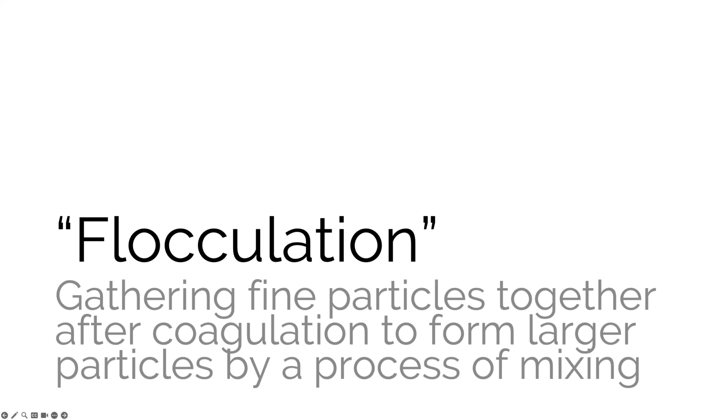And then we'll touch lightly on flotation, which is of course the opposite of sedimentation. Here we're raising lighter materials to the top of the wastewater for removal, things like fat, oil, grease, hair, and other things like plastic, things that are light. This can be done a lot of different ways with aeration, evolution of gas in water, chemicals, electrolysis, heat, and bacterial decomposition will do it as well.

If your wastewater goes septic, you can have things floating to the top that you don't want to. Some materials float by themselves given enough time. Fats, oils, and greases are in that category, which is why we typically have skimmers on the top of clarifiers so that we can capture those things that are sinking and those things that are floating. What those floating substances have in common is that they have a specific gravity less than 1. In other words, they're less dense than water, so they're buoyant and they float on top.

We'll kind of touch on flotation as it applies to different processes that we go through today, but the primary focus is going to be on sedimentation, primarily in the preliminary and primary treatment stages, although we'll touch a little bit on secondary treatment as well.

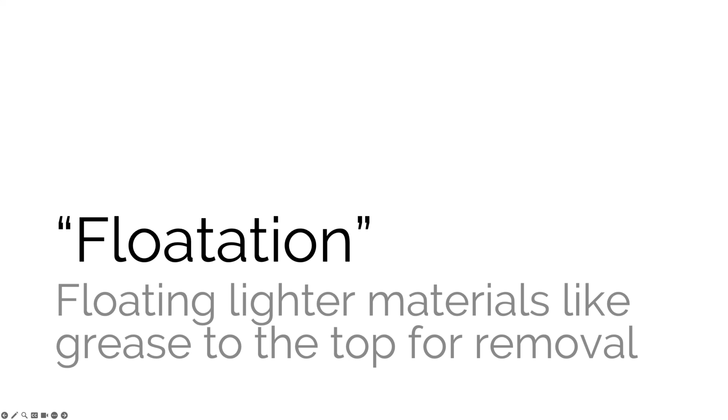The sedimentation principle is really used throughout the treatment train. In most cases, the primary purpose is to produce a clarified, though not necessarily clear, effluent, depending on where you are in the treatment process. And in many cases, to produce sludge that has a solids concentration that enables it to be easily handled and treated.

If you were with us in our last session, which was an overview of preliminary treatment processes, you got a preview of sedimentation without the math that we're going to be doing when we discussed grit removal and some of the velocity-based methods that are used.

Those particles are lighter, with a much lower specific gravity, much closer to 1, typically just above 1 to maybe 1.25 range, and the size of that stuff can be really, really small, down into the micron ranges.

The time it takes for settling to occur in primary and secondary treatment is typically a lot longer than in preliminary treatment like grit removal. In grit removal, we're talking about detention times and settling times in minutes, whereas in primary and secondary treatment, that can be in hours.

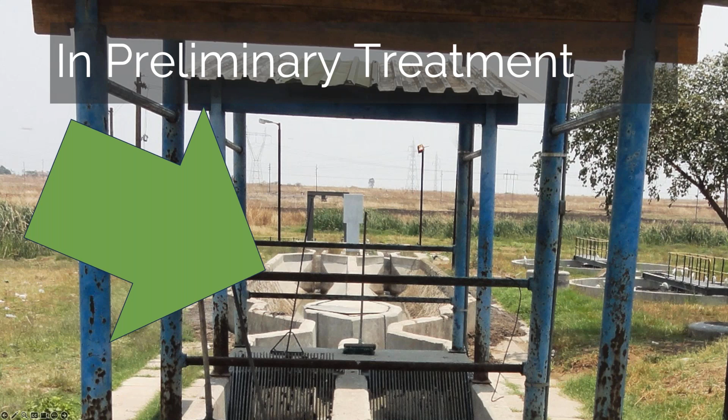As I said, we use this in primary treatment. Mostly what we're targeting in the primary treatment stages is TSS removal, total suspended solids. Tank shapes vary, but the principle is the same: we're using engineering and operation principles to give those particulates time to settle out in the tank so they don't get pushed on to the next stage.

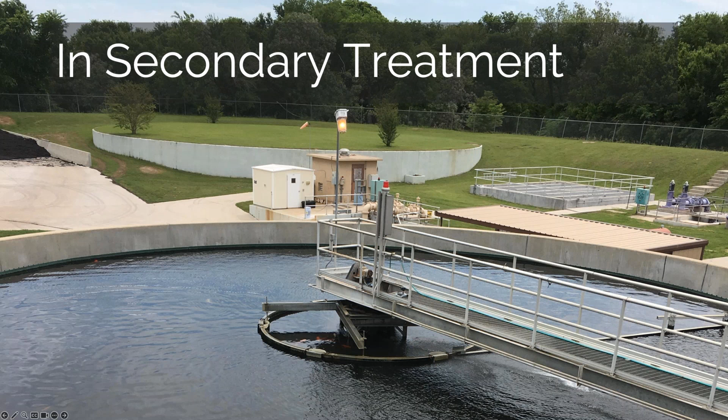We use them in secondary treatment as well. Here we're typically removing biological floc that's left over from the activated sludge process, and we might actually be removing chemical floc as well if we have a chemical coagulation process going on.

Again, much slower detention times that we're talking about, and obviously we're going to be getting much clearer water. We talked about relative clarification. The water coming out of the secondary clarifier is going to be a lot clearer because it's basically ready for disinfection, potentially dechlorination, and discharge.

So you can think of the settling or sedimentation process in a couple of different ways. There are actually several kinds of settling going on within the treatment plant, and gravity is central to all of them, but with smaller particles, we have to consider the interactions between the particles as well as gravity. Again, the primary purpose of any settling process is to produce a clarified effluent and sludge that has a solids concentration we can use, and how clear that effluent is going to be depends on where in the treatment stages you are.

Discrete particle settling is the grit and sand removal. Those particles are big enough and heavy enough that they essentially settle out by gravity without really any significant interactions between the particles. Flocculent settling is a little bit different.

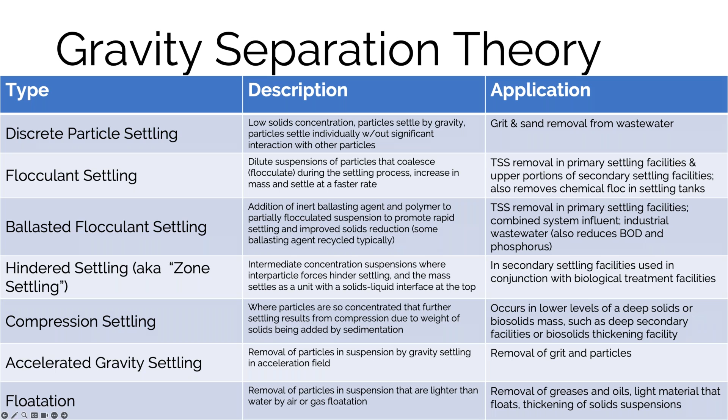So those are some broad categories, but one way to think about all of these is to think about snow falling in a storm.

If you've got a hailstorm, those are discrete particles. They essentially come straight down. They might be going diagonally because of the wind.

You can think of flocculent settling, hindered settling, and compression settling as analogous to what's going on during a heavy snowfall. At upper levels you've got discrete snow crystals. As they fall, they conglomerate together, so you get big flakes. They lay on the ground eventually, and at the surface you've got this mushy conglomeration of flakes together. The more snow builds up, the more compressed the bottom layer gets as you go. I think of that as a useful analogy to physically think about what's going on in that process.

If you happen to have a snow globe at home, shake it up and watch what's happening. That'll give you an idea of what's going on with flocculent settling. But as I said, we use settling throughout the process.

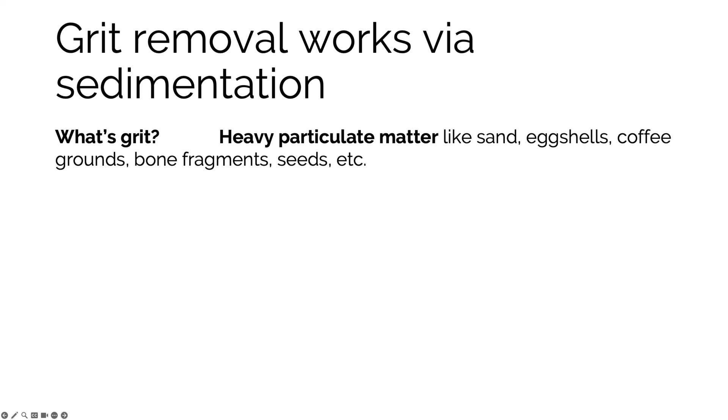I'm going to start with grit removal sedimentation, because that's the easiest thing to model. Remember, grit is that heavy particulate matter—sand, eggshells, coffee, bone fragments, things like that. Typically what we're doing is reducing velocity so that those particles can settle out.

If you were at the preliminary treatment webinar, you'll have seen some additional things that we can do. But for this simple example, we're just going to focus on reducing water velocity, letting those heavy particles settle out, and the lighter organic particles move on to the next treatment.

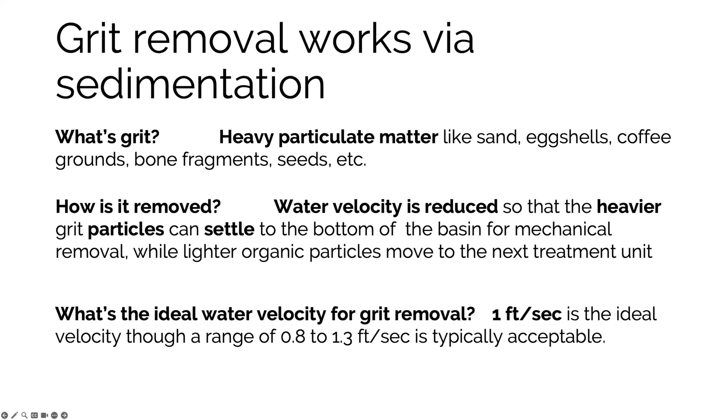It just so happens that the ideal velocity for that is about 1 foot per second, although 0.8 to 1.3 foot range is typically acceptable.

This is important, because in this process we're targeting grit, that heavier specific gravity stuff. We want the organics to move along, because if things are going too fast, we're going to push that grit into our primary tanks, which we don't want, because that'll negatively impact our primary treatment stages.

And if things are moving too slowly, organics will settle out in the grit, and when we remove it, that'll continue to decompose, create odors, and potentially attract vermin. So this is all about dialing in the appropriate velocities and depths for the particular constituent material we're trying to remove.

So now that we've got a bit of an overview, concept, and theory down, let's look at a little basic math.

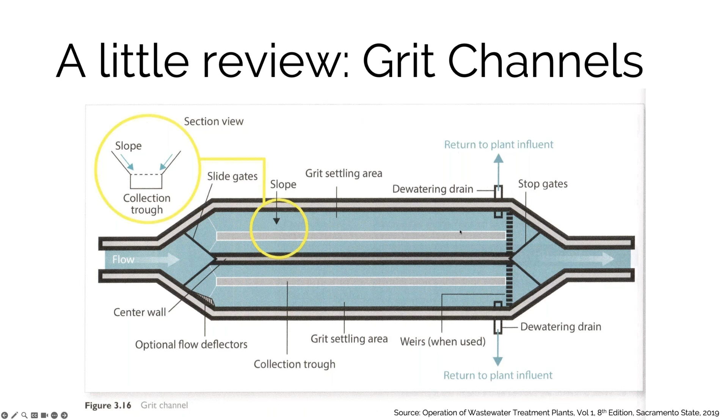Assume we're looking at this grit channel, and for some reason we're only using one side of it—maybe the other side is under maintenance. So we've got a single channel that we're looking at, and we're trying to remove particles, sand and some heavier particles.

We've established from looking at references and doing some lab tests that the downward settlement velocity is about 0.075 feet per second. That's a good benchmark for grit. Your mileage may vary depending on the size of what you're dealing with and what it's made up of, but for our example we'll just assume we've established that.

We've got a 5-foot deep basin with 4 feet of water in it. So we need to figure out how long it's going to take for that grit coming in at the top of the channel to settle to the bottom where we can collect it.

We can figure out the settling time pretty simply. Settling time is just the depth of the water, not the channel, divided by the settling rate. So we've got 4 feet of water, a 0.075 feet per second settling rate—that gives us about 53 and change seconds for grit to settle out inside the tank.

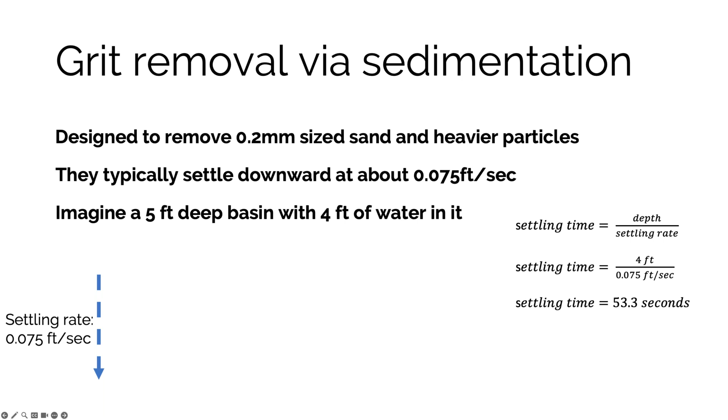Of course, that means the basin has to be long enough for the particles to settle before the effluent stream gets out, because there's a horizontal flow velocity going on as well. We established earlier that 1 foot per second is ideal, but since things are moving down and across the tank, they're actually settling in at sort of a diagonal.

So we need to figure out whether our grit particles are settling out inside the tank or getting pushed along. That's a relatively easy thing to do. We know what the velocity is here, and we know the time needed for particles to settle inside the tank, 53.3 seconds. So we can rearrange our velocity formula to determine the length or distance they're likely to travel. At 1 foot per second times 53.3 seconds, they're going to go 53.3 feet on the outside.

Of course, not every particle is at the top of the column when it comes in. Some are going to be lower, but this is kind of the outside edge. Of course, you can't randomly change the length of the basin, but if you had a 50-foot basin and you were running it at 1 foot per second with these parameters, and you were getting too much grit passing into your primary settling tank, this would give you a clue as to what's going on. Maybe your water is going just a little bit too fast for your particular setup and you need to slow it down.

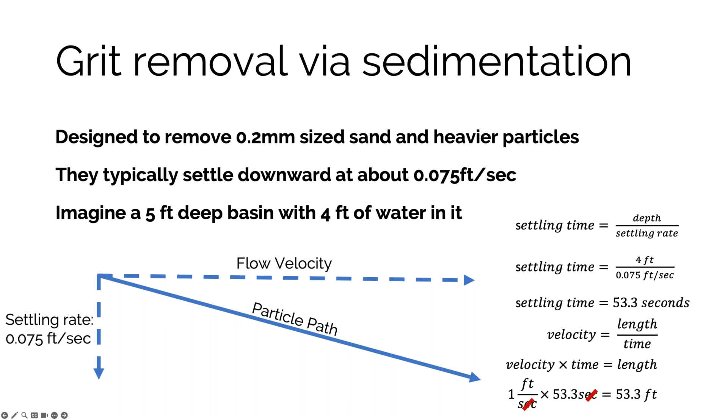So we can use the same formulas to figure out the maximum velocity for this particular tank, which again is 50 feet long, 4 feet deep. We know the settling time, we know the length, we're going to use the same formula, we've just got two different variables here. So instead of looking for length, we're looking for velocity. 50-foot tank divided by 53.3 seconds means our maximum velocity should be about 0.94, which theoretically at least means if we slow our velocity down a little bit by about 1/10 of a foot per second, most stuff should fall within that tank.

So very basic math, but really useful. You can kind of model what's going on in your tank, or check what's going on in your tank based on your observations of things going right or wrong.

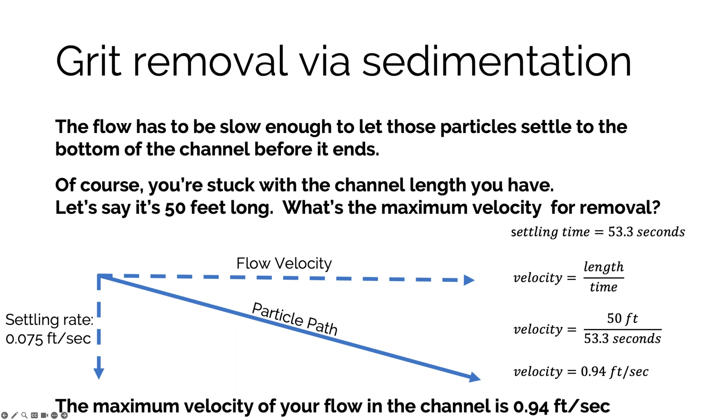So maybe you're doing this to figure out what's going wrong. Ultimately, you've got to figure out if that 0.9 feet per second is going to be effective, or if that's within the normal range. Fortunately, we can look these things up. As we said before, typical range for this is about 0.8 to 1.3. So at 0.94, we're probably within the right range. We might be able to slow it down even a little bit more.

But as with all things, there's theory and practice. Something might not be designed quite right. Maybe it's not operating quite as intended. So you might have to make some process adjustments and do some other calculations to figure out what's going on. But some very simple math here can give you an idea of why grit might be ending up outside of your channel.

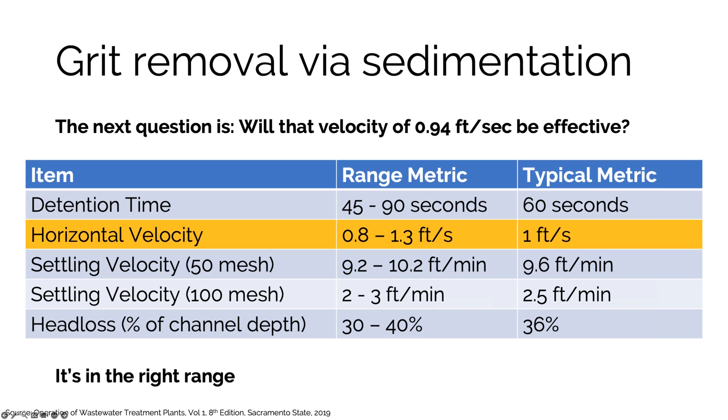Based on those results, you might realize, hey, the water's actually too deep. I need to run 2 channels at high flows and maybe only 1 at low flows. And you can use some observations and math to decide when you open both channels and run them at 2 feet, because if it's only 2 feet deep, it's going to take a lot less time for the solids to settle out, or what other options you might want to take.

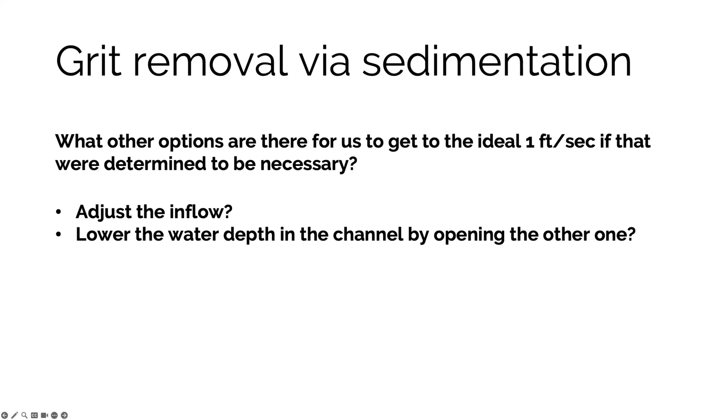You could adjust the inflow. You might lower the water depth, like I said, by opening up another channel. Maybe, as we discussed in the last training, you have a flow equalization process as part of your preliminary treatment train. So maybe you can alter those flow equalization processes to dial in the velocity and volume of water going through your grit settling tanks. There may be other options. You might realize that you need to slow it down to keep the grit out of your preliminary or primary tanks, but that you are thereby going to trap some unwanted organics. But there may be a solution for that.

Maybe you add a grit washing stage in between them so that you can then flush those organics back out and put them back into the wastewater stream. You might actually end up having to replace those channels with a cyclone. Who knows? A drastic change might be necessary for your system if it was designed for maybe a smaller population than you currently serve.

My point here is not to give you a definitive answer to solve the problem of excess grit showing up in your primary sedimentation tank, because there are a lot of reasons that could be happening. The point is to show you that some basic math, observations, and an understanding of what's physically going on in that process can help you determine A, whether your system is operating within typical or specific design parameters, and B, what impact prospective changes might have on your operations, and whether they're likely to result in the results you intend.

So, what could work, what would be practical? Those are different questions that you have to ask yourself.

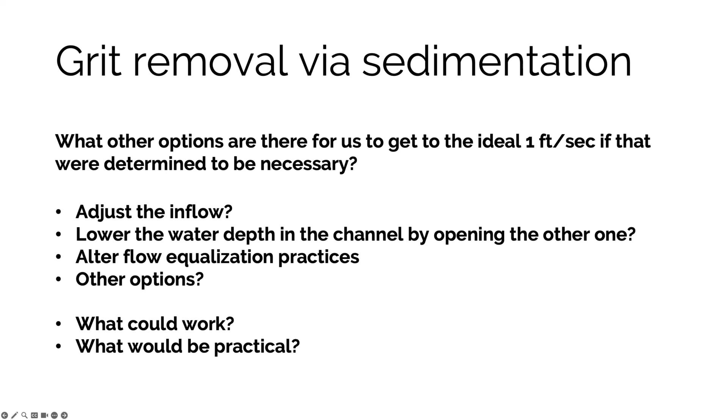And if you've got a real basic channel and you're wondering how do I figure out what the flow velocity is, a quick and dirty method: throw a stick at one end, see how long it takes to get to the other side, and use that formula d over t. Just recognize that the actual average velocity is going to be a little slower than what you calculate, because things move a bit faster on the surface. So that's a very basic example.

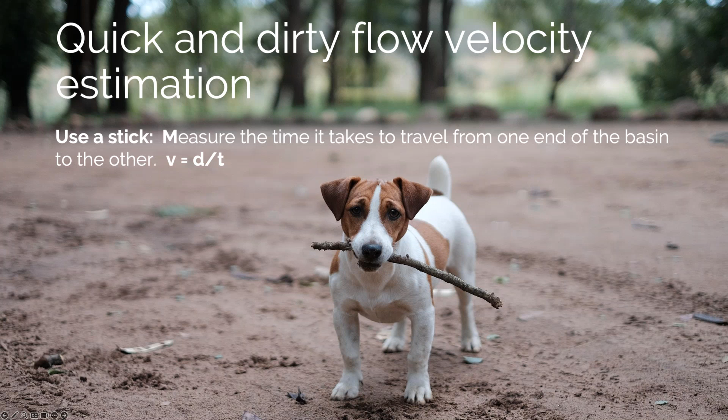Of course, that's not the only kind of grit removal process. There are aerated grit chambers as well, where we've engineered it so the water comes in at 90 degrees to the length of the basin, creating a spiral which pushes sediments to the bottom. We've also added air bubbles, or aeration, which lowers the specific gravity of the influent. An air-water mix has a slightly lower specific gravity, slightly less buoyant than water alone.

If you recall our regs and safety webinar, we talked about safety around activated sludge tanks, particularly the aerated portions. If you fall in there, there's a very good chance you're going to sink to the bottom, because the aerated water has a lower specific gravity, even though you might float if the aeration wasn't on.

When it's on, you might think the same thing's going on in this process, except instead of keeping everything moving, we're focusing on grit removal by lowering the specific gravity of that air-water mix overall. It facilitates the dropping out of that heavier grit.

I'm not going to show you any math for this particular instance, but I do want to show you that with slightly more complicated engineering, we get additional parameters to play with. So if you were having issues with grit moving through here, you have the ability to both change the depth of the water and change the aeration as well.

So you've got a mechanical action going on here, and you've got a specific gravity action going on here. So you've got some additional variables to play with, but still you can use the basic math to figure out whether things are working as they should.

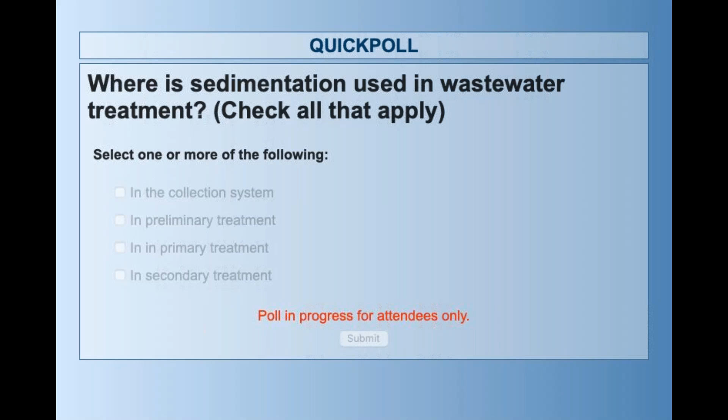All right, we got most of this right. So it's used in preliminary treatment for grit removal. It's used in primary treatment and secondary treatment as well to remove suspended solids. Typically not used in the collection system. It's actually kind of the opposite of what we want to happen there.

If you remember back to one of our earlier videos on collection system design, we talked about scouring velocity and how collection systems are actually set up so that the effluent, at least at peak flows, runs through there and scours anything that's deposited inside the collection system out.

Of course, there are probably some systems out there that have some sedimentation basins out in the collection system, but that's atypical. So it's preliminary treatment, primary treatment, and secondary treatment. It's actually the opposite of what we typically want in the collection system, because if there's a lot of settling going on there, that means things are getting plugged up and we're having to go in and clean them.

Can we run the second poll question while we're here? This is just a quick definition to remind you of what flocculation is. So is it breaking up big particles into small ones, gathering fine particles to form big ones, or discrete particle settling?

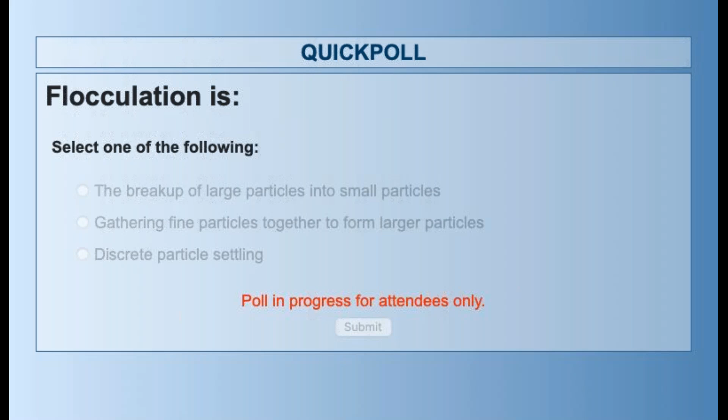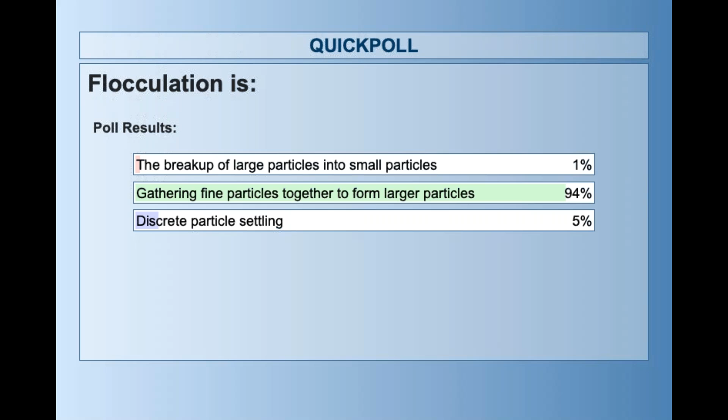All right, closing the poll in 3, 2, 1. Almost everyone got this right. Yeah, it's gathering fine particles together to form larger particles. Discrete particle settling is really more like the settling for sand and grit, where the particles aren't really interacting with each other. Breaking up large particles into small ones is the exact opposite of what flocculation is. We're basically trying to glom those tiny particles together so they'll fall out a little bit quicker. Good job, everybody.

So let's move on, now that we've done a very simple example, to talking about sedimentation in primary treatment, in primary settling basins. This is going to take up the bulk of the discussion. In primary clarifiers, they're designed to remove solids that will settle easily to the bottom or float to the top, but sedimentation is usually the principal basis of design for clarifiers.

And what we're focusing on here are suspended solids. The reason we're trying to get those organic solids out in this phase is because they typically have a high BOD, or biochemical oxygen demand, on the receiving waters and the biological treatment units. We don't want to starve the bacteria we're ranching in later stages, and we don't want to overwhelm them either. So we use our preliminary or primary treatment to dial in the BOD and solids that we want to move on to later stages.

But in primary sedimentation, we're not trying to remove everything, we're just trying to remove the bulk of things. We'll look at some typical removal rates here in a second. But because the specific gravity of the particles we're dealing with in primary treatment, those organics, is so small, and because we're relying on naturally occurring flocculation, the settling rates are really, really slow.

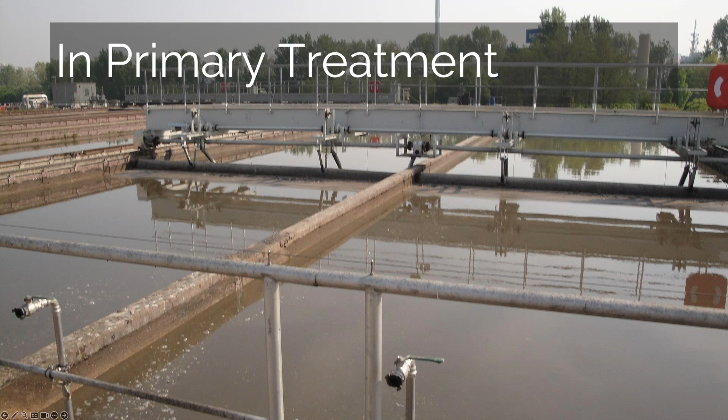So let's use the same math we used before to analyze what's going on in a primary tank. In this case, we're looking at particles with very low specific gravity, maybe 1.05 and lower, so they're going to have a much slower settling rate. Settling rate for particles in this size range is usually around 0.17 feet per minute, or 0.0028 feet per second. Look at this closely, because when we were talking about grit removal, we were talking about 0.75 feet per second, which is actually 45 feet per minute settling rate. So we're an order of magnitude slower here.

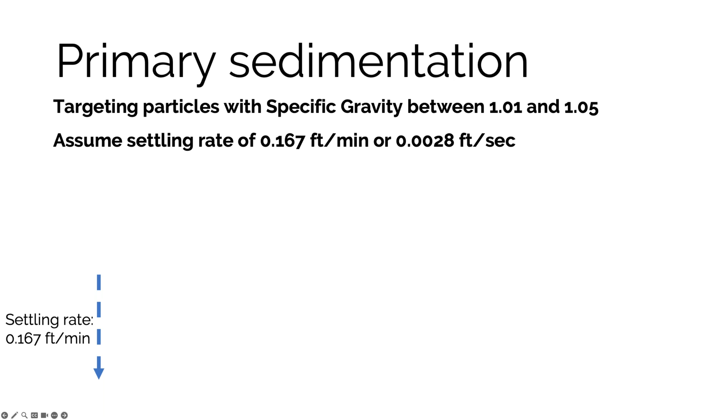For our example, let's also assume a flow velocity of about 2 feet per minute — much slower than we were talking about in the grit stage in terms of settling, but slower in terms of flow velocity, where we were talking about 1 foot per second. Here we're typically talking 1 to 2 feet per minute. And of course, the particle is moving horizontally and vertically, so it's settling in a diagonal. Just to reiterate, in this kind of settling, we're talking about minutes and hours, not seconds.

Obviously, settling rate - how long is it going to take to get from the top to the bottom? Let's assume we've got a 200-foot long channel with 10 feet of water in it. Exact same math, just some slightly different values. 10 feet deep, much slower settling rate.

We're getting a settling time of 60 minutes, and this is actually on the quicker end of things. Again, an order of magnitude different settling time means we need an order of magnitude slower velocity and longer detention time, so that those things settle out in the tank where we want them to, or at least enough of them to reduce the BOD level to where we want it for our activated sludge process.

So it kind of begs the question: where in our 200-foot long tank are these sediments going to land? Of course, some of them are heavier than this, because we're looking at a settling rate that accounts for the slowest things. Some particles are larger and settle faster, and some particles come in lower in the wastewater stream and settle faster as well.

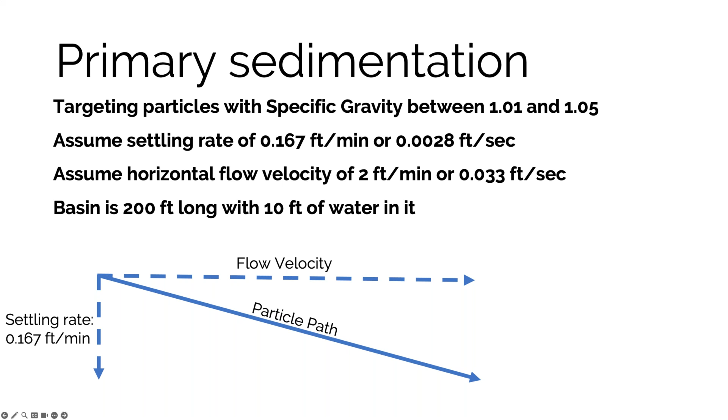We've established our settling time. Let's look at this in cross-section. As I said, what's the distance traveled? Using the same formulas - velocity, length over time - rearrange that. Yeah, 2 feet per minute at 60 minutes.

Everything should be settling out, or most of these particles that fall within the parameters we've established here, should be falling out in the first 120 feet. And again, check your units.

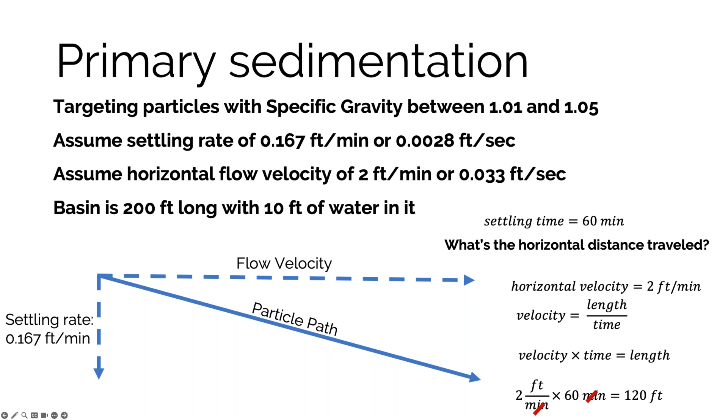So what does this mean in practical terms? Well, if this is kind of a cross-section of our basin, most of the particles should be falling out in that first 60-minute time period, within the first 120 feet.

Of course, this is entirely theory. Not everything is going to happen like that. And again, in primary settling, we're not trying to capture everything - we're just trying to capture a lot. And what a lot means kind of depends on your particular process.

So there are going to be particulates settling out here as well. There's going to be some floating around up in here as we go along. But this kind of gives us a visual of what should be happening in our tank, assuming we don't have short-circuiting going on or weird currents in our tank that are getting in the way of our settling process.

So we know where stuff should be settling out. It kind of begs the next question of, well, how much of this is settling out? That's something you can check with lab tests, and particularly in larger utilities it will be done on the regular to look at your removal efficiencies.

But there's actually an empirical formula you can use. It's used for design purposes, to get a benchmark of what you can theoretically expect given a specific detention time. As I mentioned, in primary treatment we're basically targeting BOD and TSS removal. Typically in these processes, we're going to remove somewhere between 50 and 70% of the total suspended solids, and about 25 to 40% of the BOD.

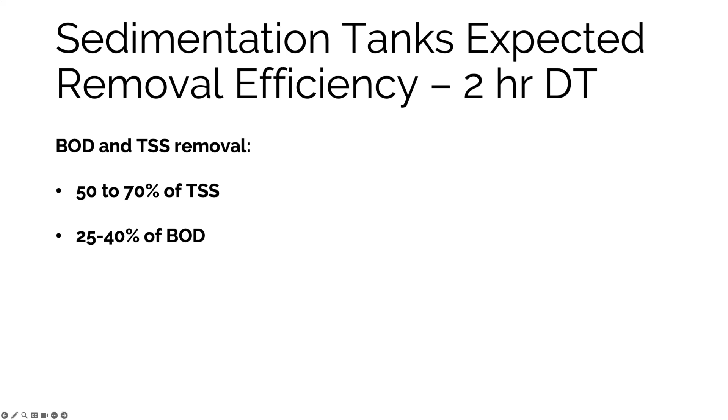So there's a different set of constants for BOD and TSS, but we use the exact same formula. We can typically expect, for a 2-hour detention time, plugging those numbers in, we should be getting somewhere around 56% removal rates for TSS, maybe around 35 to 36% for BOD.

Again, this is a formula you can use to model what the impact of changes to your procedures might be. In the example we talked about before with the tank, we had a detention time of 1 hour and 40 minutes, so 1.66 hours - so you're going to get a lower removal efficiency if you plug those numbers into these formulas. If you up this to 2.5 hours, you'd probably be up near the upper end of our removal efficiency parameters listed here on the left.

So again, another useful formula to know. This kind of thing can help you model what's going on in your system when too much BOD or too much TSS is moving on into the activated sludge process. This is a quick and dirty way, based on your existing detention times, to figure out what's going on. Of course, you have to remember that detention times vary because flows vary over the day, so this is a calculation you might do a couple of different times a day to evaluate flows at different rates.

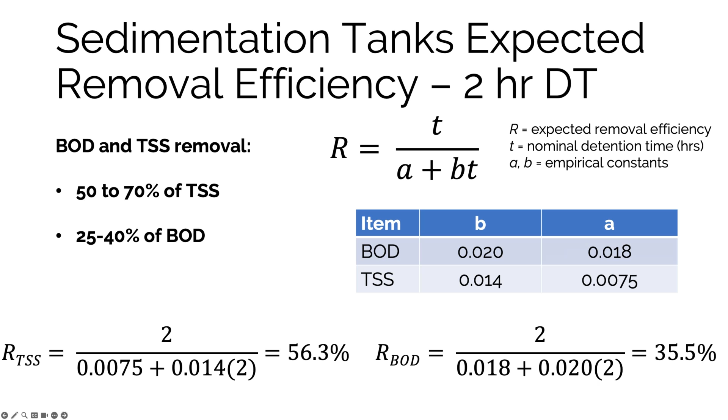We've been talking about detention time. Settling tanks typically have a 2 to 3 hour detention time. It can vary depending on water quality and what needs to be settled out. They can be calculated using tank volume and flow rate. I'm not going to go into that here since we don't have enough time, and we did cover that in our Wastewater Math webinar. If you're unclear about how to calculate detention times, I highly suggest you go back and look at that earlier webinar.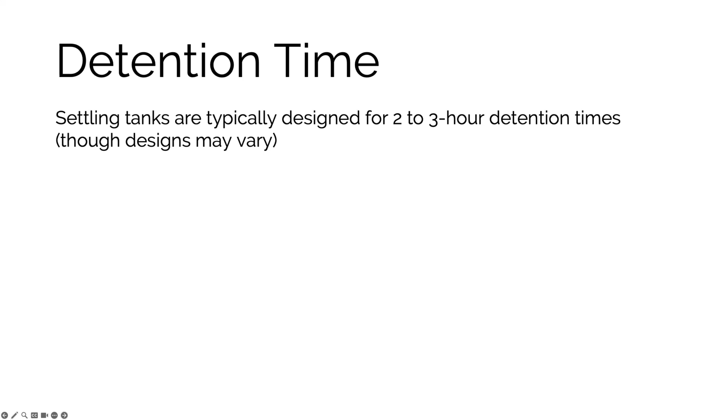This is one of those places where, again, flows vary over time, so operator experience really comes into play when you're running the plant, because you're dealing with increases and decreases in flows and organic loads based on the time of year. For those of you new to wastewater operations, this really points out that you need to talk to the people you're working with and make sure you understand why you're doing what you're doing, so you can relate your operations to outcomes.

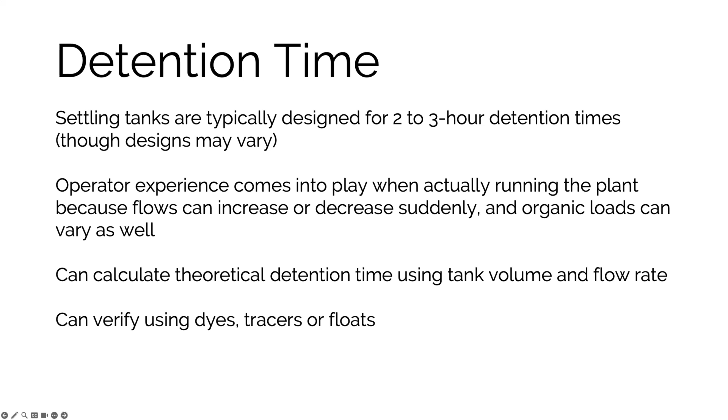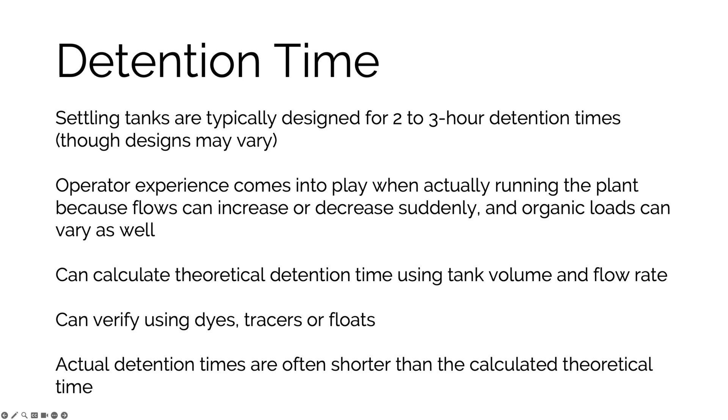As you progress in your career, you can look at a situation, evaluate it, and deal with it appropriately. Again, you can calculate theoretical detention times using tank volume and flow rate. You can look the formula up, but recognize you may want to verify that. Math is great, but what happens in practice is often a little different. You can verify those calculations using things like floats, tracers, and dyes. Realize that your actual detention times are often going to be shorter than the calculated theoretical time. If you've got low detention times and your lab tests are showing poor solids removal, you can verify whether your lab tests and the math are jiving, and then start looking at solutions. Do you need to add tanks? Do you need to restrict flow to resolve that detention time and solids removal issue?

Again, recognize that detention times are going to vary quite a bit between night and day. This is one of the reasons some systems use the flow equalization techniques we talked about in the preliminary treatment webinar, to level out that curve — basically storing and aerating some of that wastewater during high flow times so you can push it through during low flow times and have more uniform detention times and flows.

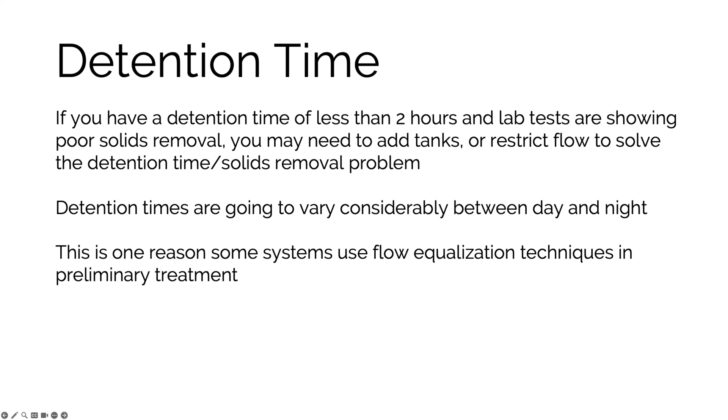I've included a real simple design flow criteria table here. I'm not going to go through this now, but if you're looking at the slides, you can use it as a bit of a reference.

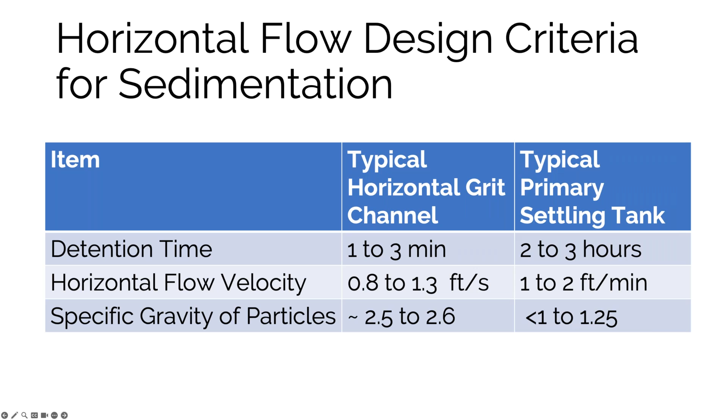One thing I left out of the tank that you probably noticed earlier is the outflow of our theoretical 200-foot tank. That typically flows out through weirs, which aren't always at the very end of the tank — sometimes they're situated forward of the end wall to facilitate clear water coming in. This is why we try to make sure most of the particles we're focused on settle out in the front half of the tank, not the back half, because near the surface where water crosses the weirs, we want that water to be relatively clear, or at least as clear as we need it. Obviously in primary treatment it won't be as clean as in secondary treatment. Of course, we don't want the water to go too fast either, because there's flow going in here, and if it's too fast, it will actually suck pieces up from the bottom. But we'll talk about that in a second.

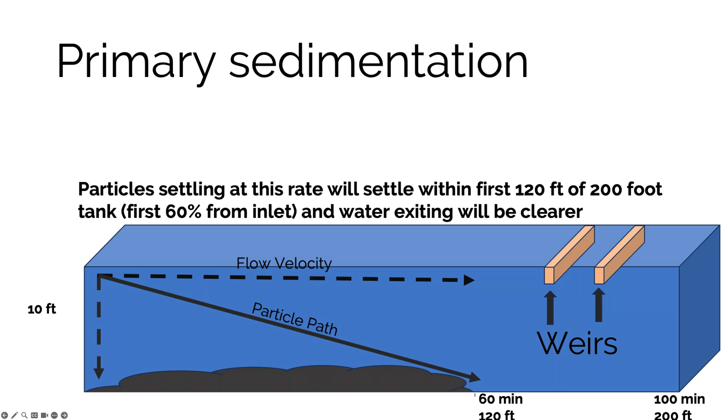So how do we decide how much water should be going over this weir? How do we determine whether our sedimentation process is probably working right? Just like detention time is a parameter we can look at and compare to typical rates, there's something called the weir loading rate we can use as well. And just in case you weren't sure what's what, that's the basin, that's the trough, that's the weir.

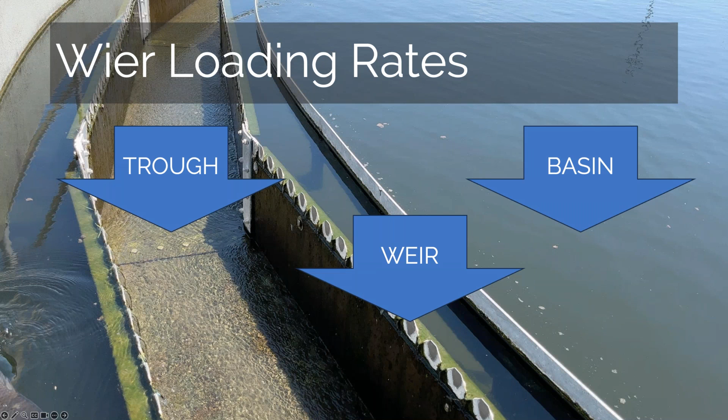The weir loading rate is essentially the linear feet of weir that water's flowing over relative to the flow over the course of a day. It's really important to understand what that rate is to make sure you're within operating parameters and you're not short-circuiting your operation or your basin. By short-circuiting, I mean creating areas where there's really high velocities near the weir that might actually pull solids out and into the next process that you don't want to.

So it's a normalized value. It's the number of linear feet of weir in the clarifier in relation to flow. So it's the flow divided by the feet, and we talk about it in terms of volume of flow over 1 linear foot of weir per day.

I'll show you how to calculate it in a minute, but typical design parameters are typically between 10,000 and 20,000 gallons per day per foot of weir. It could be higher for fast settling solids or intermediate treatment where you're not trying to remove as much of the solids from the stream, but in secondary clarifiers, particularly if you want higher quality water, you're going to have relatively low weir loading rates, maybe even below that 10,000.

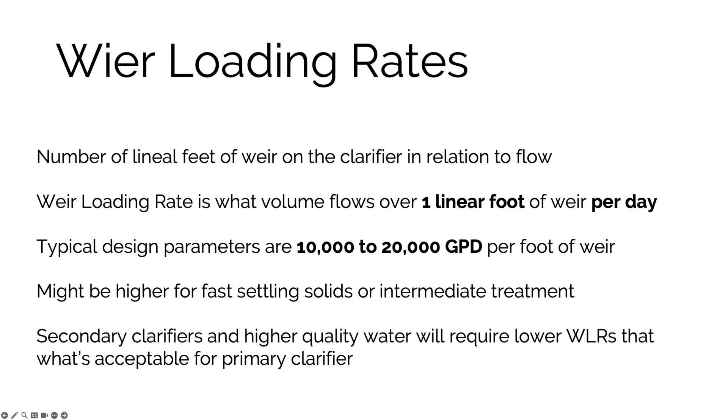So how do we calculate that? Again, really simple formula: it's the flow divided by the length of the weir. What you've got to remember is it's the flow in gallons per day. So on an exam, you might be given something in 5 mgd. You need to convert that into gallons before you do this, otherwise you're going to come up with a number that is wrong.

And then, of course, you have to calculate the length of the weir, which is going to depend entirely upon the design of the basin. If it's rectangular, it's going to be one or more widths of the basin. If it's circular, you're going to have to use pi times diameter to figure out the circumference of that weir. Again, it's really important - it's not the circumference of the basin, it's the circumference of the weir. As you might recall from our picture, the weir is typically sitting right inside the basin. There are some different designs, some are actually on the outside, but that's something particularly to pay attention to when you're doing these calculations.

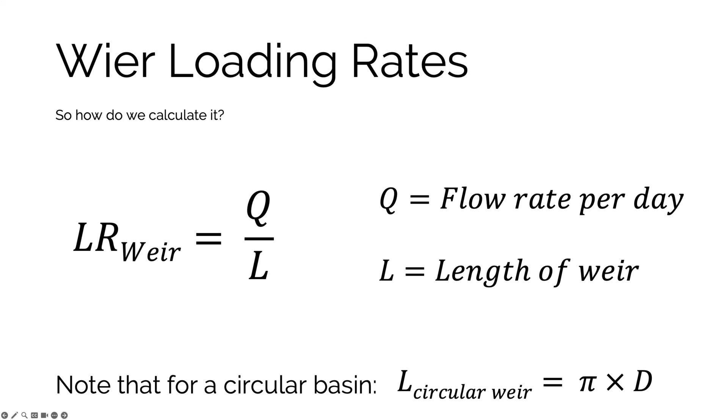So let's do a quick loading rate example to give you an idea of how you might calculate this. Imagine we've got a circular clarifier. The weir is 75 feet in diameter, and we've got 5 million gallons per day flowing through this thing. Since it's a circular weir, we've got to figure out what the circumference is, because again, we want the linear length of the weir. So that's pi times the diameter, 3.149 times 75 gives us roughly 236 feet.

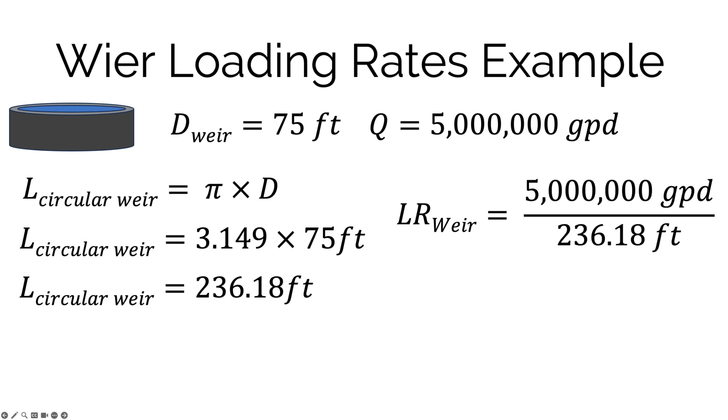We get a weir loading rate by simply dividing our flow in gallons per day by that linear feet. That gives us here a value of 21,170. I've got that in yellow because it's just a little bit outside typical design parameters - it might be a problem, it might not. Again, if this were on a test, I would probably say it's outside of design parameters.

In the real world, it might be just fine. It's 6% outside the typical range, but you might also have relatively low solids concentration, so that higher weir loading rate might be okay. It's really going to depend on the situation, on what's acceptable, and on what you're observing in test results of the effluent coming out of here, the clarified effluent.

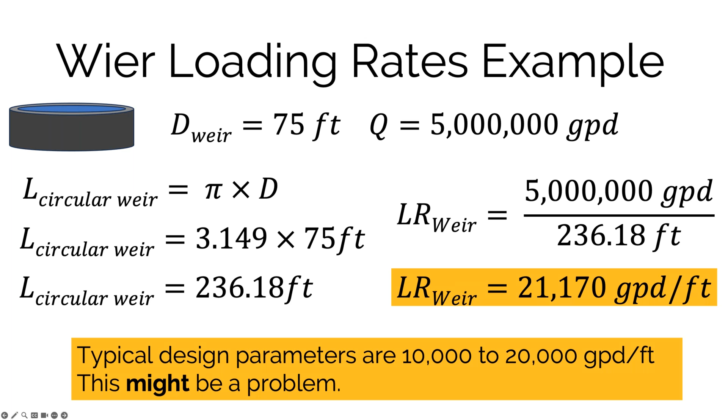So again, in the rectangular example, I showed multiple weirs. A lot of times there are going to be more than one. A small system might only have a single weir, but a large basin may have multiple weirs. So you need to take that into account.

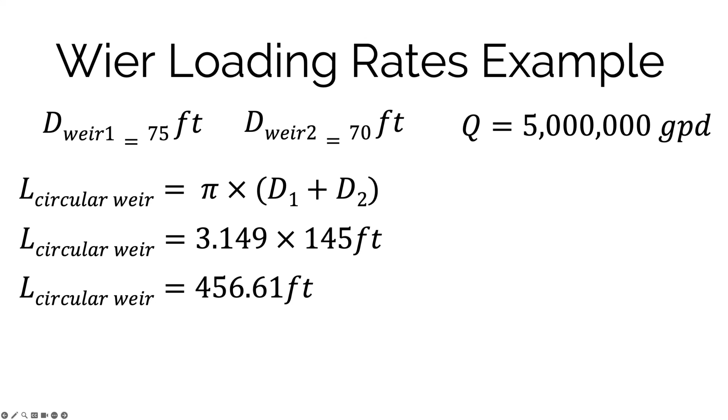Here's a simple way to do that. I've got 2 weirs here, 70 feet in diameter, 75, just add them together, come up with the now significantly larger length, do my math, and now I've got a weir loading rate of just under 11,000 GPD per foot, which is well within the normal design parameters. So again, sometimes things look weird because you did the math wrong, so that's something you need to look at.

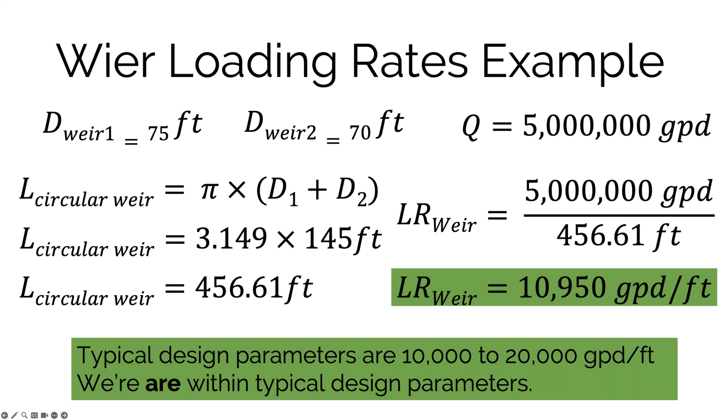There is also the surface loading rate. I'm not going to go into depth with this because it was covered in that Wastewater Math webinar we did a while back. But this is just another relationship. It's GPD per square foot of clarifier surface area.

It's another metric we can look at to evaluate whether our performance is correct or if we're having problems. This is math we can run to see where the problem might lie. It's simply the flow divided by the surface area, a slightly different way of looking at how fast water is moving through the basin, which of course then impacts the settling action going on in that basin.

So we got about 12 minutes left. Let's switch gears and talk a little bit about some things that impact sedimentation. Then I'm going to do a short blurb on secondary clarifiers and what's going on there, because it's essentially more of the same, just more complicated because we've got flocculation going on there.

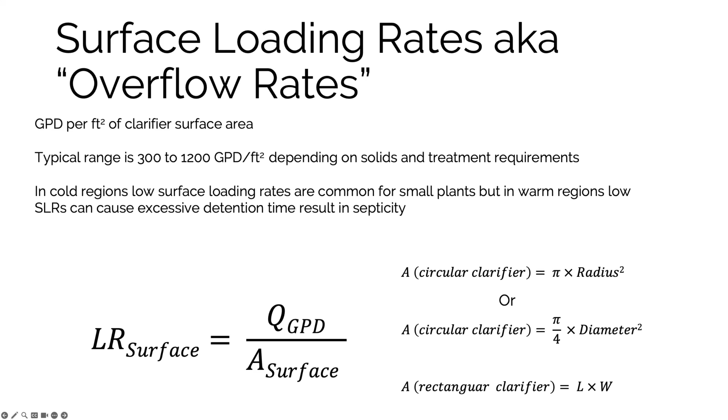But since we're talking about sedimentation and things that can go wrong, I want to talk about a few things you really need to be aware of. One is that temperature can have fairly significant impacts on sedimentation processes, particularly if you're in an area with very big seasonal temperature swings, or if you've worked at a plant in Arizona for a long time and then move to Michigan in the wintertime and wonder why everything is taking a lot longer, this is why.

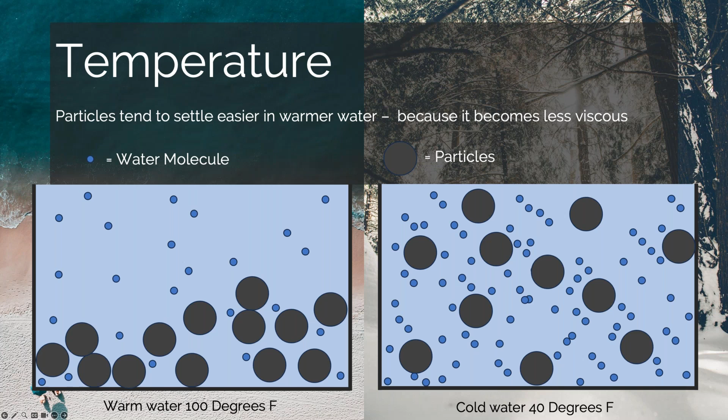There's also the issue of short circuiting, which I referred to earlier, but I want to show you specifically what that is. Short circuiting is when water in the tank isn't being evenly dispersed across the area, and that results in velocity gradients where the water is moving much faster in part of the tank than it is in the other.

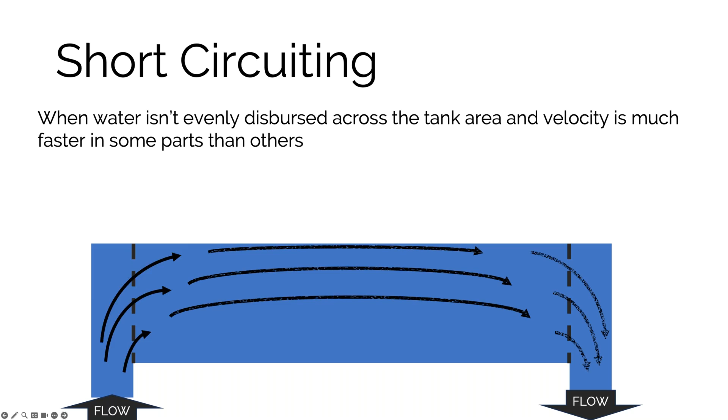If it's designed badly or not operated correctly, you can end up with a flow pattern like this, where you've essentially got two different velocity gradients going on. You've got a high velocity area near the top, but because of the way the water is flowing through, you end up with a low velocity area at the bottom.

This results in a phenomenon called short circuiting, meaning in the high velocity areas, the water is moving through much faster than it's supposed to. The detention time is lower than what you want, and you're probably pulling a lot of the particulate along with it that you want to actually settle in the tank. Conversely, in the low velocity area, the detention time is increased, which can be a real problem, particularly in primary treatment, because your influent might become septic and develop odors.

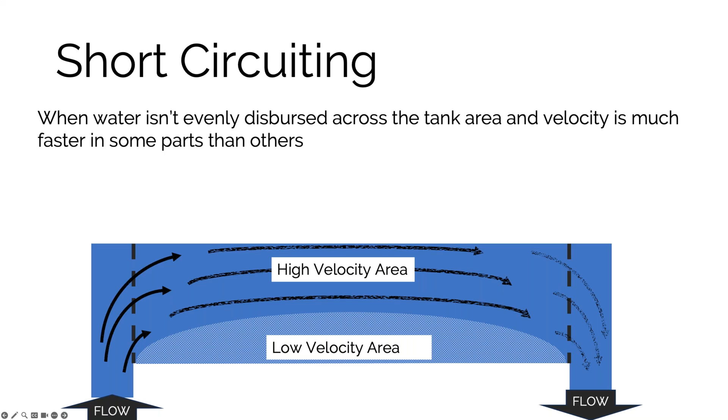Good design and good operation is really key to avoiding short circuiting. That's why these things have weirs and baffles and port openings in them, and designers pay special attention to inlet design to make sure the flow is even, so that what's happening on one side of the tank is more or less the same as the other side. Again, high velocity areas reduce the detention time, low velocity areas increase it, and that can cause problems. There are other kinds of short circuiting that can happen due to temperature stratification in the actual tank.

There can be a temperature differential between the influent coming into the basin and the water already in the basin. So if we've got a situation where the basin is cold and the influent is very warm, and it's typically not ice cold because it's got biological things going on in it, what can end up happening is the influent kind of flows along the top, doesn't mix throughout, and as a result you end up with a short circuit at the top and septic conditions at the bottom of the tank.

Again, in the high velocity area, you've got a reduced detention time. In the low velocity area, you've got an increased detention time. Particularly in primary treatment, this can be problematic because if it's septic down there, things are decomposing, and bubbles might form that start raising sludge and causing all sorts of problems.

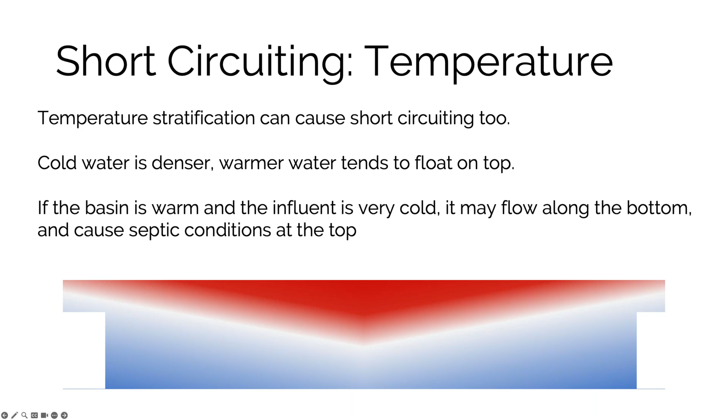Of course, the reverse can happen as well. If we've got a situation opposite here where the basin's warm and the influent's very cold for some reason, you might get a travel path like this, where the cold influent is kind of sinking to the bottom and then moving out. Basically it's the same issue, just reversed—you've got low velocity at the top, and higher velocity at the bottom.

As a result, you can get septic conditions. And of course, since that's at the top, whatever smells develop are going to be out for your customers to complain about. So these are things that you really want to pay attention to.

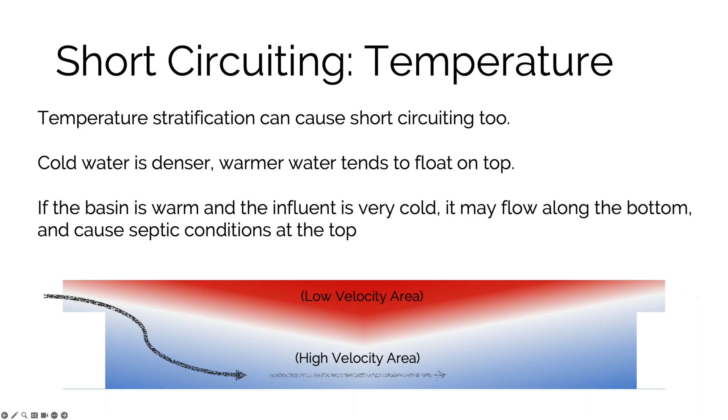Having high velocity areas at the bottom can be really problematic because, as we talked about in the collection system, we design things to have scour velocity so that things don't stay in the pipes. Well, in the tanks, we don't want scouring velocity because we want the particulates that settle to the bottom to stay in the tank. Scouring velocity is kind of complicated—it depends on a lot of things: the size of the particles, their specific gravity, friction factors, and particle cohesion. I've got an example here for a particular primary tank.

The scouring velocity in this particular tank would be about 12.4 feet per minute. So assuming things were operating as normal, without significant short circuiting, and you weren't just shoving water through here, this shouldn't happen, because the tank is typically designed to run between 1 and 2.5 feet per minute.

Scouring velocity probably isn't going to be an issue in your actual operations, but this is something you should look into, particularly for upper level certification tests, because you may need to know this and be able to calculate it. Unless the plant was badly designed or you're operating way outside of normal parameters, this probably isn't going to be too much of an issue, but there is a formula and tables you can use to look up and check it, doing that mathematical modeling to see whether you've got a significant problem.

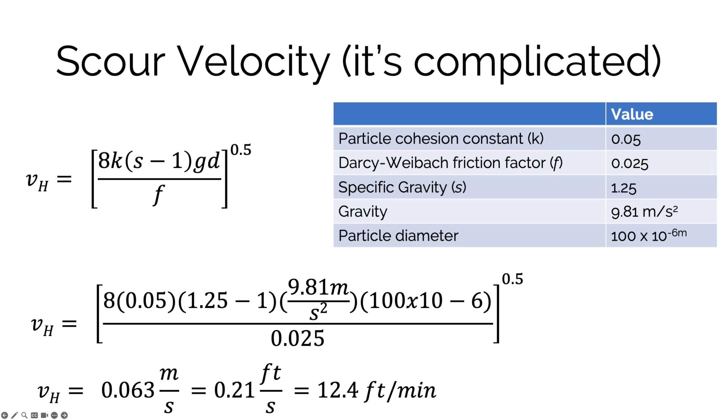I'm going to skip this last poll question in the interest of time because we're running a little slow, and I did want to give a short amount of time to secondary treatment.

Physically, this is kind of more of the same. We're talking about gravity settling. The difference here is that we're hopefully getting much more clarified effluent. At least initially, we're looking at higher suspended solids concentrations coming into the tank than we'd necessarily see in a primary tank. Again, we've got some fancy engineering helping us, particularly helping that flocculation, whether it's naturally occurring or whether we're supplementing it with polymers and additives to make sure that's occurring in the tank where we want it to.

We're also going to be dealing with flocculation in our secondary clarification processes. There's a lot of different designs: rectangular tanks, center feed tanks, rim feed tanks, and a lot of different sludge collection methods, but they're all using the same principles, just different design methods. I'm going to show you a circular version to talk about this.

The reason we're trying to get all of the solids out of the effluent in the secondary clarification process is because that's got a lot of bacteria in it, and there's not really any food left at this point. So we want to get the microbes back out of here and back into the activated sludge tanks where there's food so they can do their job. We use our secondary clarifier to do this.

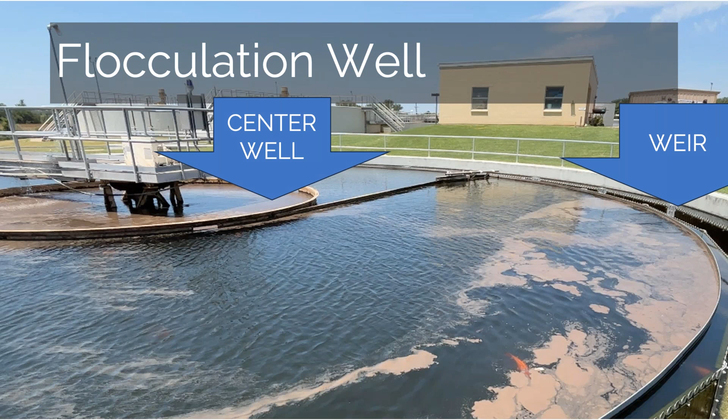Typically you're going to see this in secondary clarifiers, almost always with a scum baffle on top. That stuff up there is scum, leftover things, some stuff that gets blown in, little bits and pieces that haven't been trapped earlier, with very low specific gravity, lower than 1, so they're buoyant and they float. There can also be a variety of other things in there. We've got a scum baffle that sits between the weir and the center of the tank.

It's usually only a few inches deep because we're basically just trying to capture stuff on the surface. And then we've got our skimmer arm that is very slowly moving its way around the surface, capturing all of that gunk that's floating on top and pushing it off into a tray.

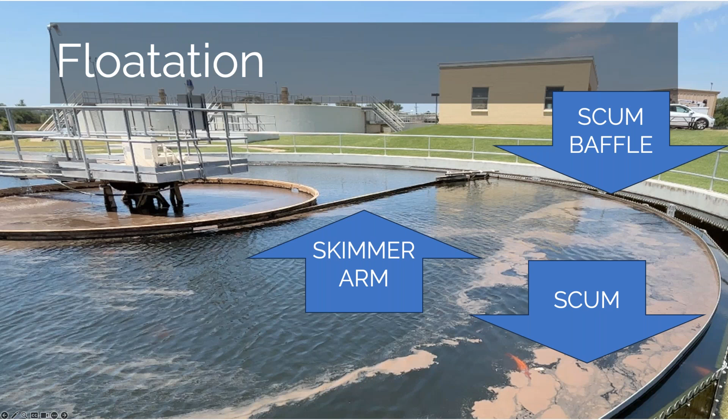So, quick and dirty discussion of sedimentation, flotation, and flocculation as it applies to some basic wastewater treatment processes. My goal wasn't to do a definitive education on all of the pieces, but to give you some basic formulas and information you can use both on the test and to check facility performance. You can use surface loading rates, weir loading rates, removal efficiency, and detention time formulas to compare to common design values or the specific design values for your system. These are always going to be used in combination with lab tests and process controls, but used together they can really help verify that your operational goals are being achieved.

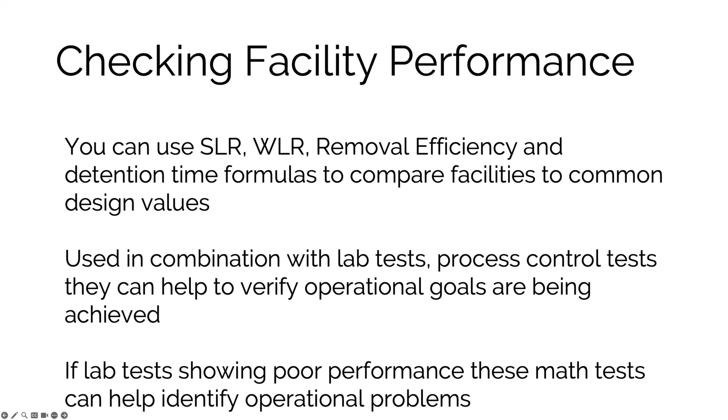If you're getting lab samples and they're not what they should be, you can go back to some of this math and your understanding of what's physically going on in the tank to assess performance and look for problems. If lab tests show poor performance, because that's typically where you'll first notice it, the math can help you identify where the operational problems are happening, since you're sampling throughout your process. So again, quick and dirty - I went a minute over.

I'll open the floor to questions.